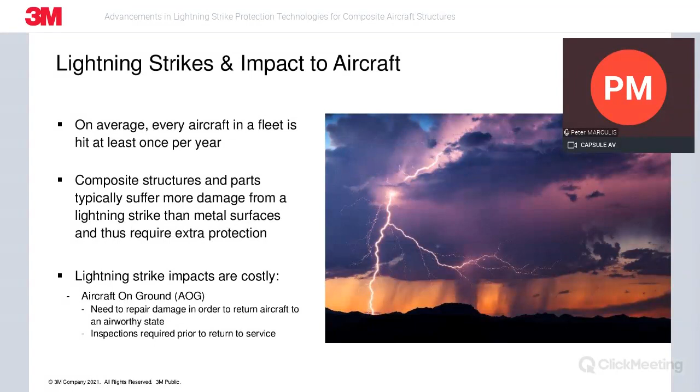Traditional aircraft structures have been made in metal, and there's a shift in recent years where OEMs have been making the change towards composites. The potential for damage increases with composites, thus these parts do need extra protection, and we'll touch on this in a bit. The major issues or consequences are really the loss of revenues for the airlines or operators due to aircraft on ground. There is a need to repair damages caused by the strike to make sure it is safe for it to return into service and into the skies in an airworthy state. With that said, there are mandatory inspections that need to be done before the return into service happens. This causes delays in departures, possible flight cancellations, and other. Next slide.

So knowing that aircraft do get strikes regularly, the FAA and other certification agencies around the world have defined how to view the aircraft. We won't go into too much detail here, but when you look at this image, you break it into zones where you are most likely to get the high current from the initial strike. Highlighted in orange over here, I'm not sure if you see my cursor, is zone one. Well, you'll get a lot more current, but small attachment periods. And then you move into zone two, which is highlighted in green, where the lightning will sweep across the aircraft, reattaching multiple times as the aircraft flies through the strike.

You could see this in the bottom right image with multiple strike points. And then that strike leaves the aircraft, typically from the rear or trailing edges. That exit point doesn't really shift too much, and protection often provided in those areas are static strips that you would basically see sticking out from the trailing edges.

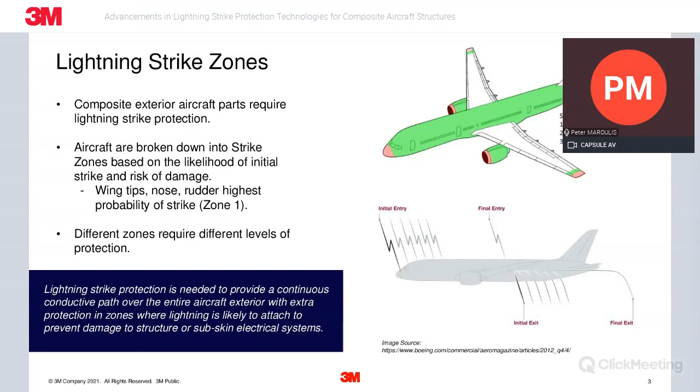So each of these zones require a different degree of protection, and these are all defined by each one of the OEMs. Dealing with a high current from an initial strike requires more protection than the lower, slower burn that occurs in zone 2 type strikes. Something to keep in mind when you're looking for different solutions and how and where they could be used on your vehicle. Zone 3 is known as the conduction zone. Essentially, it's surfaces not in zone 1 and zone 2 where any attachment is deemed unlikely. Next slide.

Composite materials are chosen due to their light weight and more flexible nature, but they don't handle current like metal. As we have alluded to earlier, metal structures tend not to be as damaged as composite surfaces. Aluminum is highly conductive, and when struck by lightning, you'll typically see paint damage at the location of the strike. And depending on the intensity of the strike, we may see some pinhole burns within the aluminum to a decent large burnout area. But again, this is not common for metal structures.

Composites, on the other hand, will basically blow out if not protected. The photograph at the bottom shows an unprotected composite. You see the fibers all destroyed over there. As a result of that, there's a need to add a form of protection on that outer surface, and that's typically a conductor of some sort that will help minimize the damage to the structure.

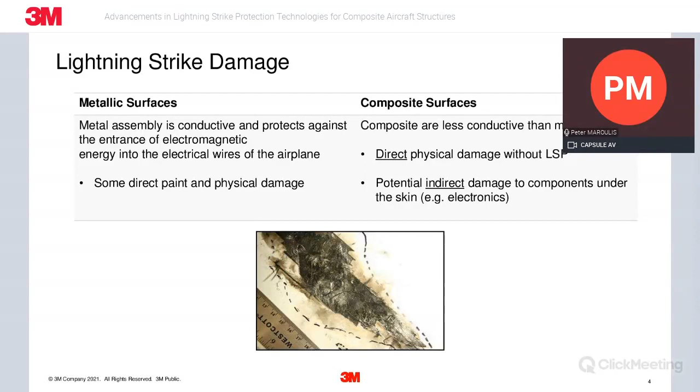So composite parts need an extra layer of resin, which is known as a surfacing film, in order to provide a smooth surface comparable to the finish of a metal surface. Next slide.

The typical technologies that are used in the industry today are shown in the slide. I have the foils at the top here. You could put a continuous foil on the structure. This comes with challenges in shop handling and conformability. We'll touch on this with these other foil technologies as we go through. The most traditional solution in the industry today is the expanded copper foil, but we do also see some aluminum foils in this space.

So expanded aluminum foils. Basically, those are materials that are cut from continuous foil by putting slots into them and then stretching the foil to create this expanded foil. We at 3M, with some of our partners, have been looking at perforated foils for the last few years. And this technique involves cutting specific pattern designs that are optimized to provide additional performance, which we'll cover in the next section.

Less common, but still used a little bit in our field, are woven and interwoven conductive materials. The conductive fibers are woven in the outer layer of the fabric that goes onto the structure. Typically less effective, but maybe more efficient to put them on the aircraft during its build.

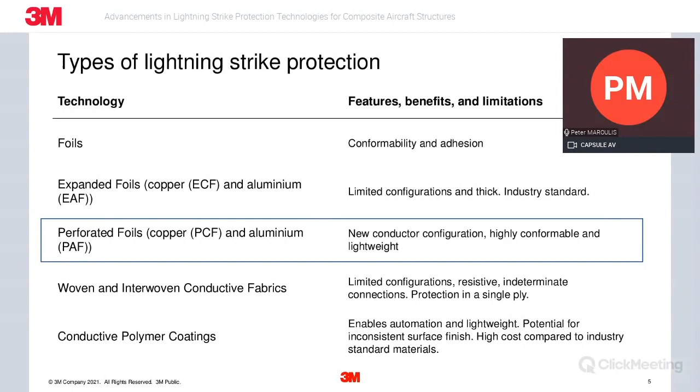And then finally, conductive coatings, which can be applied on the surface by spraying. 3M has done some experimental work in this area in the past. There are some big challenges with these coatings. For instance, ensuring you get enough conductivity with those solutions. Another one is knowing how much material you have applied. And finally, operator consistency is critical. These could all be resolved in some ways, but definitely a challenge to be aware of. Next slide.

So we really need to think about these foil solutions. And when we look at traditional expanded copper foil configurations, it's basically a network of fibers that are joined together at nodes. You need to fill that with resin for you to get a smooth surface, which makes it important to think about it as a whole system. You see the image on the right there. You'll see it in this presentation: the combination of the resin and the conductor applied as the outer surface of the fiber-reinforced composite, which will then see a paint process overcoated.

There are a lot of functions that this outer layer must perform. These are listed in the slide here. It protects the structure from damage due to lightning strike. It needs to provide a smooth paintable surface, hopefully with little to no pinholes. And there are a bunch of secondary performance requirements that make it a good system.

So it needs to prevent micro cracks from forming that could allow moisture to get in, which could cause corrosion in the embedded foils. There's also a need to remove the paint and surface for various reasons. So these systems require adequate performance against the chemicals used for cleaning and paint stripping. They need to be conformable to contoured surfaces and repairable after damage.

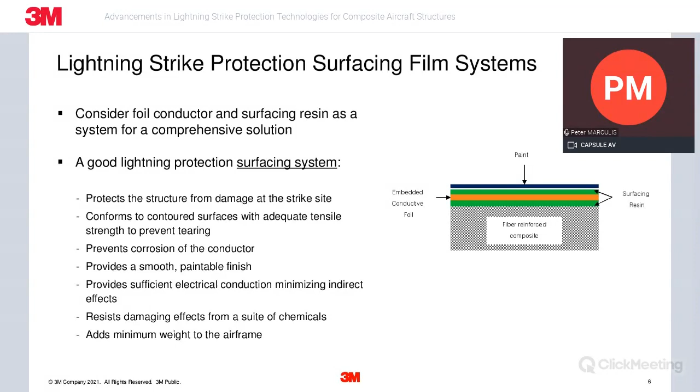And finally, little to no impact on the weight. Obviously, a reduction would be nice. This is highly dependent on how much protection you would choose in each area. Slide.

We've already touched on some of the content on this slide, but ultimately the surfacing resin, while a thin layer on the outer skin surface of the structure, performs a vital function. And it's important to design a chemistry so that the cure characteristics of the resin system match those of the underlying structure, and you end up with the resin being where you want it.

In the images on the right here, this is a painted piece of skin. One has a poor surface finish and the other has a good surface finish. In the left image, you can clearly see some pitting. And this is challenging and frustrating because pitting doesn't actually show up until you paint the area or after you have painted the part. So when they are preparing the skin of the aircraft for painting, it's often sanded and prepped, and any defects are filled.

And so if your choice of surfacing film can provide a defect-free surface, then you could hopefully reduce a step within the paint preparation process and not be surprised by the possible telegraphing effects of these contaminants through the surface.

There's also a lot of time and effort going into making sure these surfacing films have the appropriate shop handling properties. Someone can make them too sticky or not sticky at all. They need to be stored outside of the freezer for enough time. It's the first part that often goes up on a buildup and it's often the material that is left out of the freezer the longest. So making sure it has a long enough out time for your needs is key.

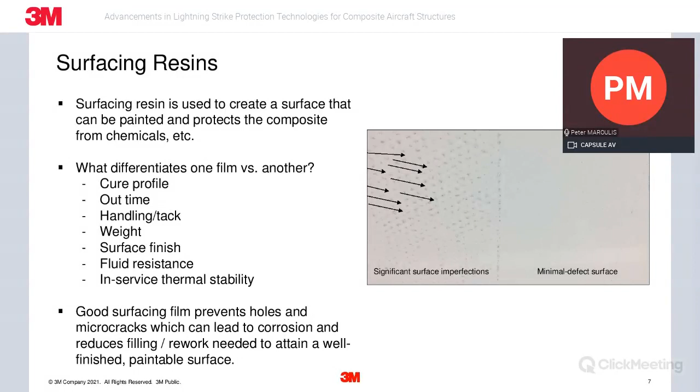Keeping weight out of the structure is always a top priority. We've touched on the chemical resistance just before with the paint stripping process. And the in-service thermal stability due to thermal cycling seen on the exterior surface of the aircraft is also important. Next slide.

In this slide, I want to expand on the differences between the expanded copper foils and the perforated copper foils. In terms of the expanded copper foils, the foil itself is cut. So there's a slit, as you can see on the image on the left, and then it's stretched. So what you end up with is those nodes that you see in between those open areas. If you look at the cross section of the wires, at the nodes you have a large amount of copper there, which is essentially not doing much in terms of electrical performance.

Theoretically, you need a constant cross section throughout the entire network. There's a lot of excess copper in these nodes. So what 3M has been working on as a design is a perforated solution that doesn't have the excess copper in those node points. If you look at the cross section at any given point in the perforated copper foil in the image on the right, it is constant throughout, and this is one of the ways we've been able to take a decent amount of weight out of our solution.

Important to mention here, though, since we are not restricted with our manufacturing process, we can tailor the conductivity in any direction. So the image you see, the long hexagon facing the down direction, is giving us more conductivity in one direction over another. If you take that hexagonal pattern and rotate it, you could then prioritize the direction of your increased conductivity. Also, if you make this hexagon perfectly symmetrical, you could have X and Y conductivity matching each other. Next slide.

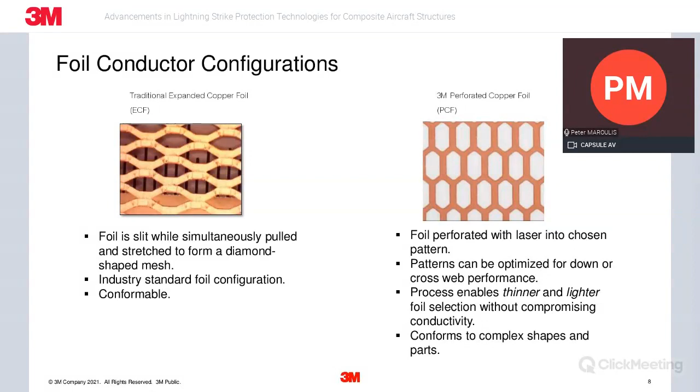In this slide, you will see two images of a Zone 2A strike. This is a 12-ply unidirectional composite prepreg underneath. The panel on the left has an expanded copper foil conductor with a weight of 175 grams per square meter. The dots show where the system has been grounded, and you can see the damage from the strike. On the right, the panel has a perforated copper foil conductor with a weight of 60 grams per square meter. It has a hexagonal perforation design, and you can see the damage is quite similar in size to the image on the left.

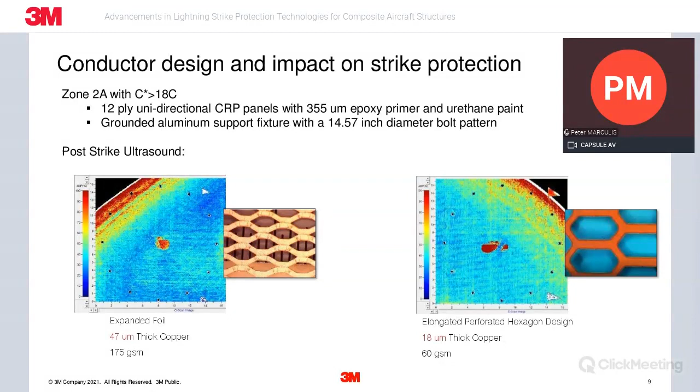So it's important to know that the results here can vary with the thickness of the paint. The higher the thickness, the more charge builds up outside of the paint, which then bursts through the paint and attaches to the conductor. This results in more damage. The lower the paint thickness, the less resulting damage, hence why we chose a 355 microns thick primer and top coat system, which is usually at the higher end of what's tested. Next slide.

We will see an interesting observation here by comparing an expanded copper foil film with a perforated copper foil configuration within a film. Not only can we get a better use of the metal within it, but you could ultimately use thinner foils. So as a result of that, a lot less resin is also required, which could then lead to an interesting reduction in total weight.

The image at the far left, we go from a 76 microns thick copper all the way down to the other extreme at the far right here on the slide, where we have a 12 microns thick copper, which we've perforated. And if you look at the chart, you could see that the cross web and down web conductivity of a traditional expanded copper foil goes from 1.6 and 4.8.

And if you compare it with the other examples that are given here, the resistance is lower, so they have equivalent or better performance in electrical conductivity. Also, if you look at the data, what we're also trying to highlight is that you could flip the orientation of the hexagonal pattern of these foils, and you could get your conductance in either direction. But in all cases, we meet and exceed the resistance that is given with the 76 microns expanded copper foil.

And as a result, a lot less resin is used in here. So if you look at lines 3 to 5, from the conductor weight of 142 grams per square meter to 88 grams per square meter, and for the resin system from 150 grams per square meter to 55 grams per square meter. So some significant overall weight savings here for the potential of this type of solution.

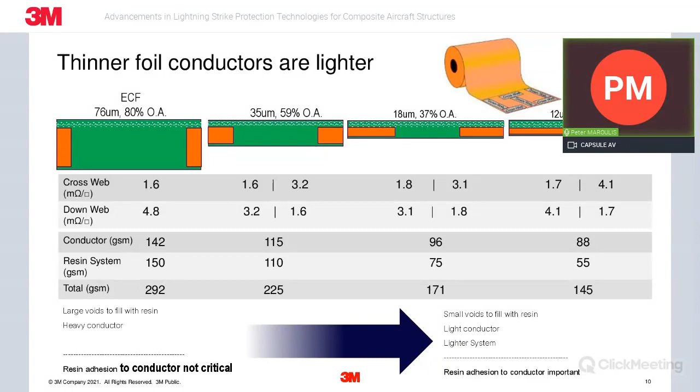And with the limited amount of epoxy that is bled through here on the far right, you would need to start looking at surface treatment on the copper that would help with the adhesion of the whole system. This is not something that hasn't been resolved, but something that needs to be considered for perforated copper foils with a much thinner configuration. Next slide.

Sorry, I'm getting some chats here.

Okay. Here we have some examples moving from expanded copper foils to perforated copper foils. The 73 grams per square meter ECF and a 142 grams per square meter ECF are pretty standard materials in the industry. Below them, you will see the weight of the resin and the total system. Then on the right of that, the numbers that you see there for the PCF are what we have designed to be equivalencies to the ECF materials.

And what you end up seeing here is less copper, less resin, and resulting in about a 20% reduction for the first comparison and another 26% reduction of weight for the second one. You can extrapolate this with the total weight of the system used on the aircraft you're working on, and that could be a significant number for large vehicles. So pretty exciting technology that could really provide some solid value to your design.

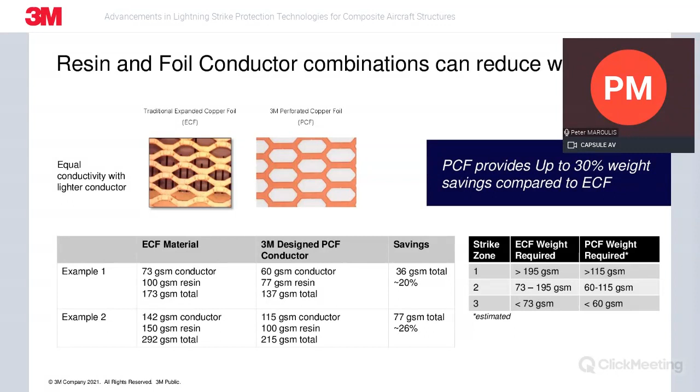So one of the examples of a surfacing film that we use with these conductors is our new AF536. It is a dual cure resin system, 121 Celsius and 177 Celsius, so 250, 350 Fahrenheit, compatible with both fabric and tape systems. We have launched it and made it available with both the traditional expanded copper foils and our newly designed perforated copper foils.

The material itself does have a good shop handling property, the appropriate tack, and is repositionable during the application. These are great features for operators. In fact, we've incorporated a glass scrim that you see here in this material to help with the handleability, but it also controls the formability of the conductor itself, and it creates an additional barrier from sanding processes.

In addition to this, we've really focused on a formulation that can help improve surface finish and minimize or possibly eliminate any imperfection you may have now in your process. It has also been tested for chemical resistance with different solvents and paint strippers. And then finally, it is available with and without a built-in lightning strike.

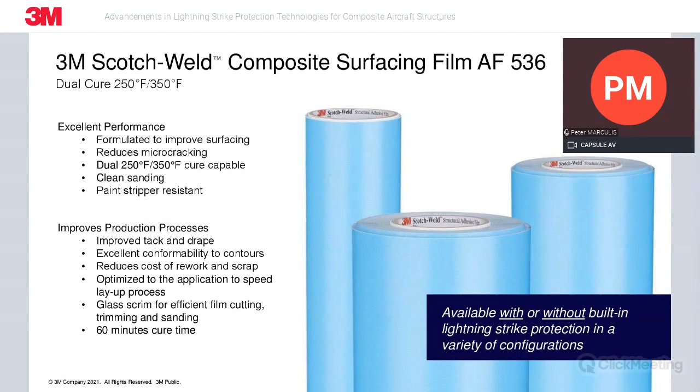Next slide. So the last slide here, I know I'm running a little bit over. It's a table from our technical data sheet.

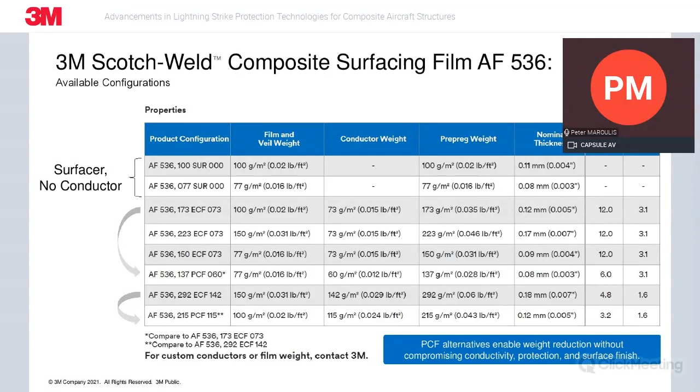So just wrapping it up, since the time was short, I was not able to cover any of the other advancements, but what I could say at a high level is that there is work with these systems on AFP, so that's the automated fiber placement. So typically today, lightning strike materials are applied by hand in large sheets, and this is done on parts that are made with specialized and sophisticated equipment. So we've challenged ourselves to find ways to use the automated fiber placement equipment with our lightning strike materials.

And finally, we have started working on a novel lightning strike system, which I'm hoping we could present one day at the JEC.